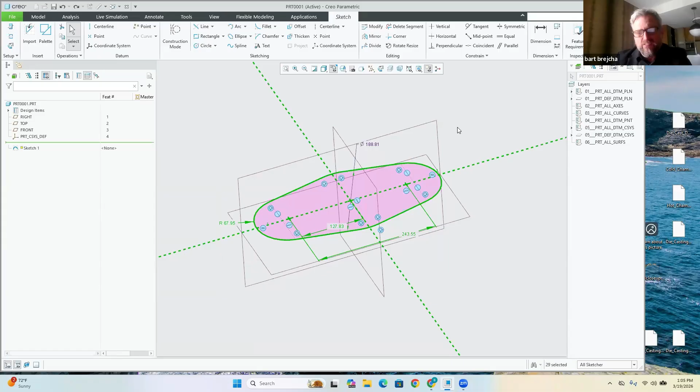So I started to build this little shape here. This is something out of our Learn to Design course. And what I'm going to do is right hold down and reach for this modify button and drag some of these dimensions around. Oh, look, I missed one. So you can click on it with the control key and it automatically adds it to the dialog box.

This is one thing that's different between a mid-range tool and a high-end tool. The high-end tool, I could hold the control key and add to it. And look, now the whole thing scales. This has been in Creo since Wildfire 2, but pretty cool. Now I can just type on one of these numbers and type in 2.5 or whatever it is, and now my part's a more appropriate size because I started a little bit too big.

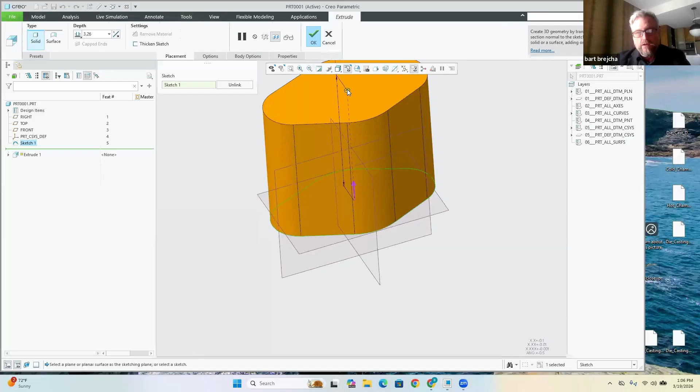All right, so what I want to do next is talk about model-based definition.

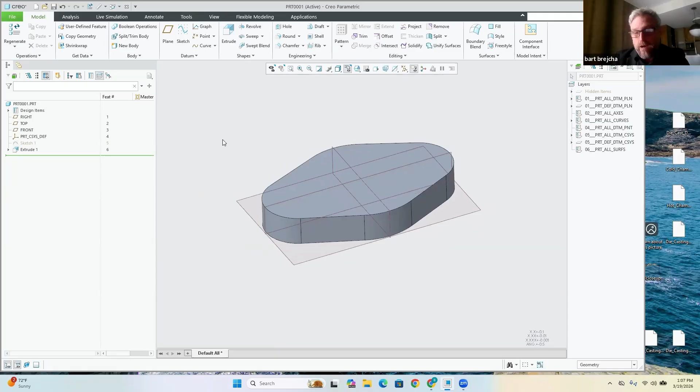I remember hearing Deb say MBD, and I was like, man, all these acronyms drive me crazy. MFG, TMB, model-based definition, or is it multi-body, right? So I'm just not a three-letter acronym person, but I know our managers are. So if you hear me ever make a three-letter acronym, I'm being passive aggressive about it. I'm just being funny. But so this part is let's talk about MBD.

So I've got this annotate button, right? So if I make a drawing out of this thing, that's going to be my front view. There's my top view. There's my right view. So I'm under the annotate tab. I tell young people annotate's kind of like a dimension on a 3D model. So although we've got the word dimension in here, right?

So this is the basics of GD&T. In our 2-day GD&T class, we'd probably spend an hour and a half playing in the model-based definition. And the super value is if we can set up all these GD&T values inside the 3D CAD model, it just automatically displays in the detail drawing, which is what we're trying to do, save time. Nobody wants to spend hours and hours building drawings, but we all do it.

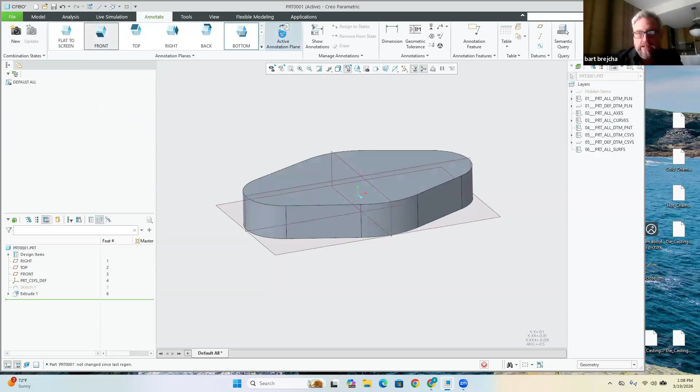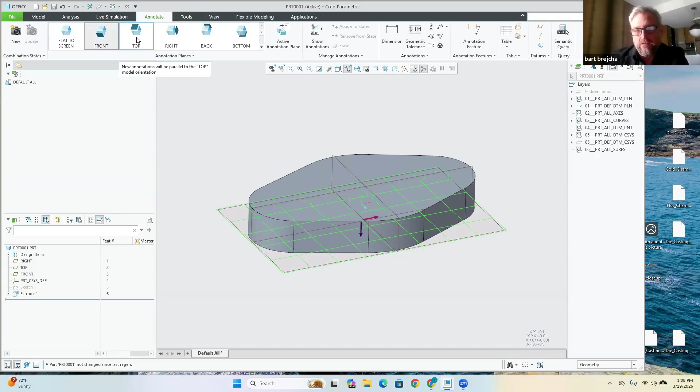Okay, so let's look at that again. I got annotate, I got the front view, and if I click on active plane, it shows me the front view. So this is probably new, I think, in like Creo 2, Creo 4, something like that. So if this is new to you, speak up. I'm curious. The only way I know if it's new is if I'm in a Creo user conference in person and people are like, well, back up. What did you just do? So clicking on this sets the drawing view that the dimensions are going to be in.

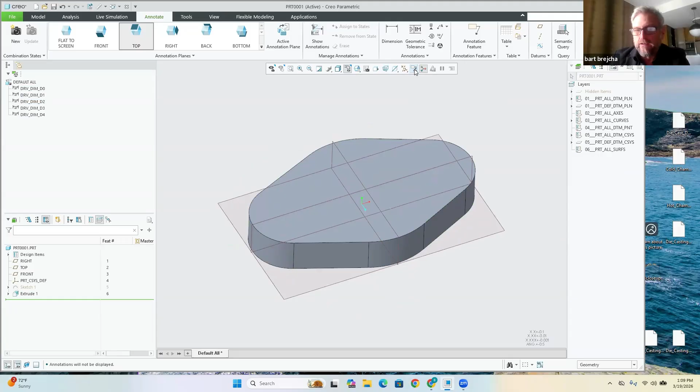Now I can come over to this Show Annotations button and click on the model. Remember how we show the model dimensions in the detail drawing? It's the same thing. So I can select them all and say, okay, and now they're always on the screen, which can be irritating, but most folks don't know that that's what this button does. The annotation tab turns them on or off because it's a little confusing having all the dimensions on the screen.

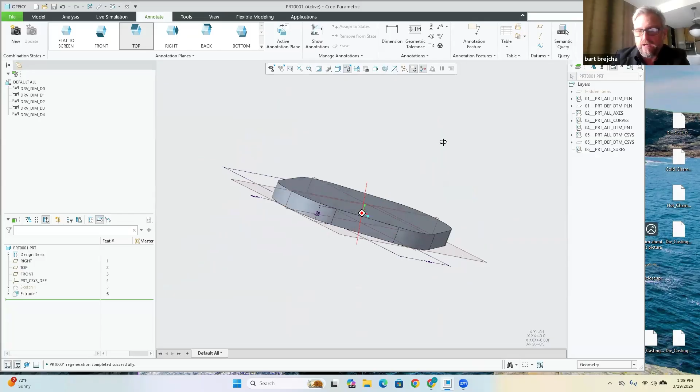Now I extruded this thing in a particular direction because I'm particular about that stuff, but my dimensions are actually on the sketch that are on the plane. And if you need them to be a little higher up, you can just left click on the dimension, right hold down, and move it to a particular plane, which is a bit confusing because the other dimensions are still on it. And as you can imagine, you can hold the control key down and fetch all the dimensions, right hold down, and move them to the proper plane.

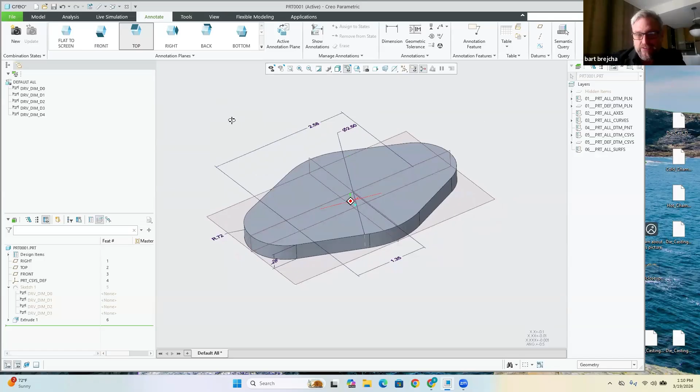So I try to encourage young people that are taking our Learn to Design course or even seasoned veterans taking our surfacing classes to go slow for a minute. Let me show you all the cool new things that are in Creo. Sometimes the surfacing course could be 30% Creo update training plus surfacing. So the more experience we have, I think the more we have to learn, because the software has changed so much over the years.

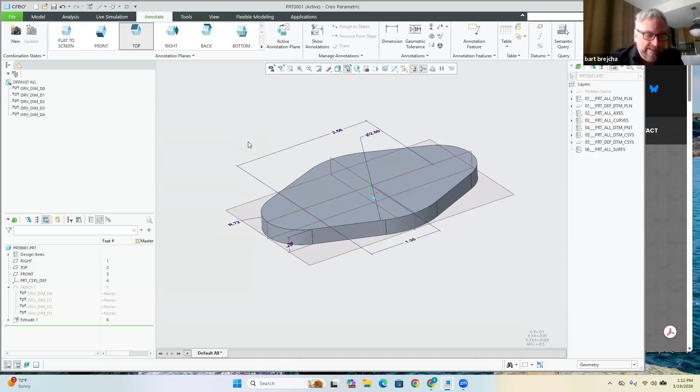At one point, I had over 150 products at Target. I mentioned that at a conference, a holiday party, and one of the owners of the design firm called BS on me. Most of the products I had on the market were from Beyond Design because I was the engineer there, and to be funny, he was counting the entire line of Scunci hair combs as one product. I was counting that as 14. So most of the products were from Beyond Design that year. It was 2004 or something like that. Barbie flashlights to hair combs.

All right, so Design Engine. And I've been speaking at the conference for what, 25 years, Deb? 30? Yeah, been a while.

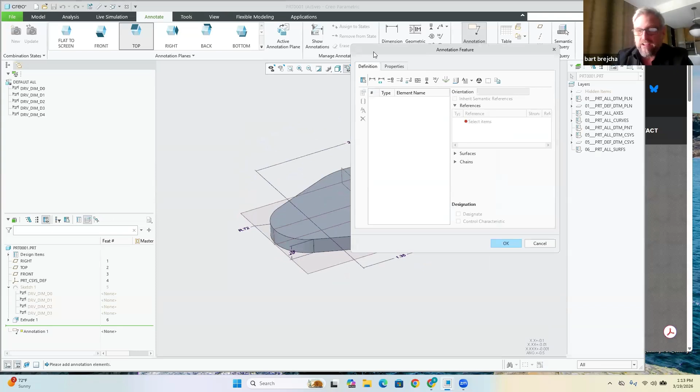So I've shown the dimensions on the screen, and look, they're in position where you want them to be. So there's a bunch of things you can do. You can create an annotation feature. I'm on the technical committee to help PTC develop the tool, but one of the things I like to do with the annotation feature is just make notes in the model tree. If we're doing a plastic part design, I might put a note in here that says TPE starts here. And that's nice for me when I come back a year later. So any features after this are for the soft touch rubber.

So there's other things that we can do with model-based definition. So I'm going to stop playing with this for now, but show dims is how we call it when we're showing dimensions in a detail drawing. So if I make a detail drawing out of this, all the dimensions that I used automatically are sort of earmarked for the drawing, which makes it so much quicker.

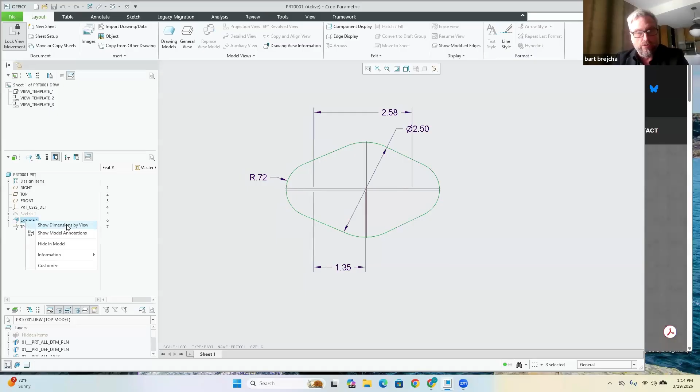Another thing I try to get people to do, even seasoned veterans, because if you got 700 to a couple thousand features on the model tree, show all is just overwhelming, and that's going to make me want to take a 2 hour lunch. So what I do is I tell people to show the dimensions one feature at a time, and then move the dimensions or determine whether you want to get rid of them or not, or you're going to take it back to the sketch to change it. All right, so let's be done with that.

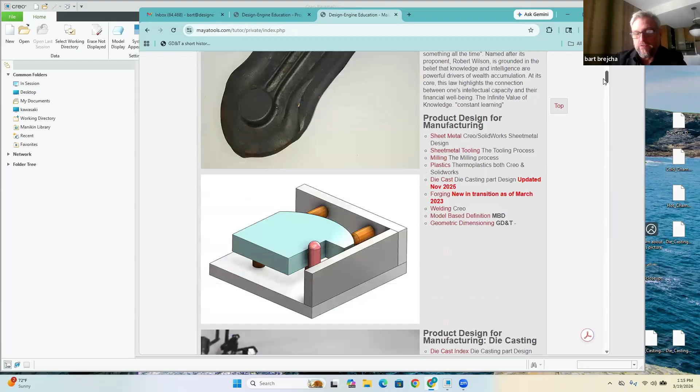All right. So my first job doing GD&T was 1992. And my dad and I sat down and looked at the GD&T book. You buy an ASME Y14.5 book. It cost $75 back in those days. And we spent all weekend looking at it because I had a job that required GD&T. It was AutoCAD. I spent part of the day building the model, and I turned it in.

And the checker wanted to know what the box was around the text. And I didn't quite know how to answer it because I thought it was a trick question. Well, it's a basic dimension. I explained what a basic dimension was, and he got really annoyed and said, "We don't do that here." And the job description was GD&T. What I didn't realize is that there's a bastardized version of GD&T at this company. Part of it's from the 50s, part of it's from the 60s, part of it's from the 70s, and well, I think actually it was like

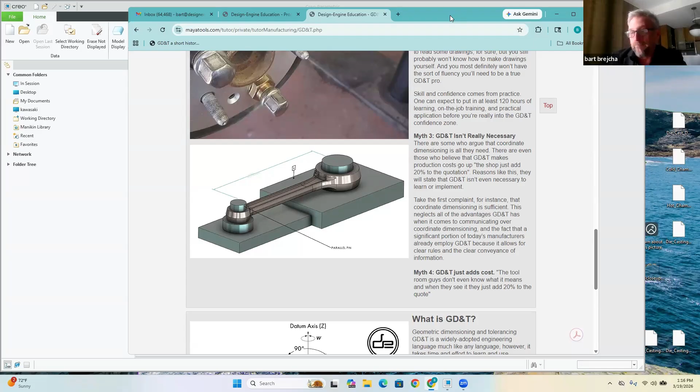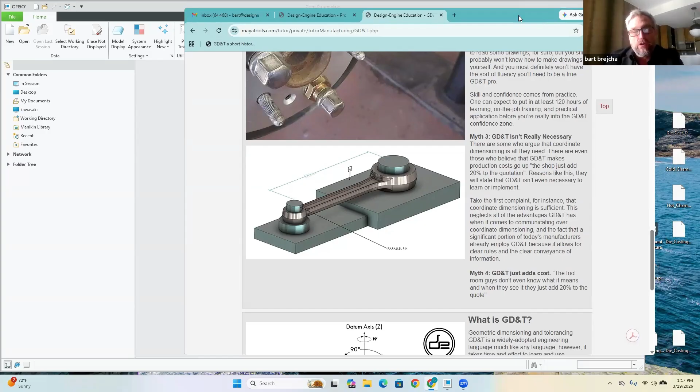I think 2009 was a release, and 2018 is a release. So what the software manufacturers do is they kind of put their 2 cents in and say this software should work like this. And then they make their software do exactly what they voted on. So it's really hard to cheat and make the software do something like from 1970, you know? They've taken out that functionality. So be mindful of that as you experiment with this stuff.

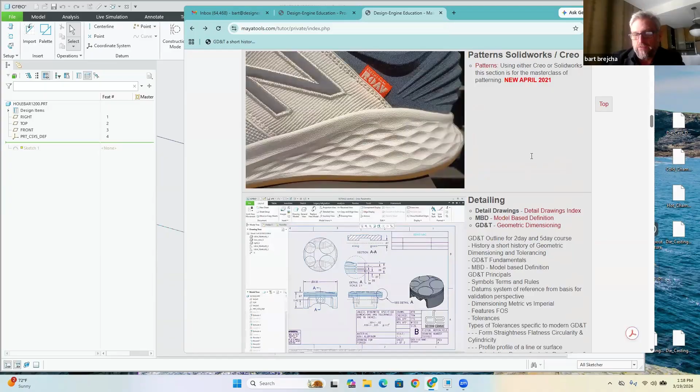So this exercise I'm getting ready to play with is called the hole bar, and I've got probably 20 books on GD&T, and I took it from one of the books. So what I'm going to do is go to that in our Learn to Design course and just talk through it for a quick second. So if you send an engineer that has maybe 1,000 hours on Creo, you would send them to our Learn to Design class, and we kind of send them back trying to show you something, right?

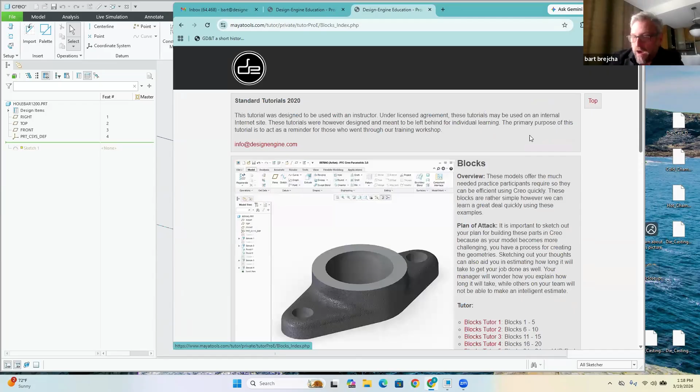So we do top-down design, detailed drawings, and they model all these blocks in a day. And some people get pretty frustrated because they think everybody else is building them faster than they are. And we talk through all the cool new things inside of Creo, like split bodies and what have you. And on day one, we're coming down here to look at sort of GD&T, and I pose this question: if you know GD&T, what's wrong with this thing?

So Design Engine, we like to learn from mistakes, and you can't have a B datum with respect to a B datum. That doesn't make sense, right? So I like to leave some of these typos in here to just kind of think about it. So this one's a profile dimension that goes from X to Y. See?

But you wouldn't have a maximum material condition on the tolerance for that as an example. So that's kind of wrong. Not kind of wrong. Inappropriate might be a better word. So there's two holes. This should say 2x here. Oh, there it is. Yep. So that's good. Here's another one. Perpendicularity should be relative to A, not B. So little typos in there.

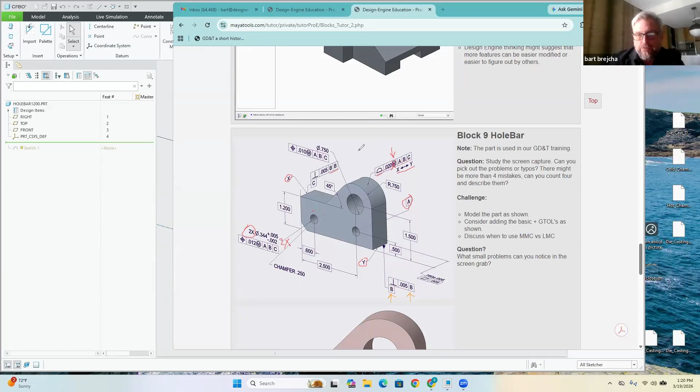Let's build this thing. And my intention is to show you a few little, let me double check on the time. So my intention is to show you a few little tricks inside of Creo. I happen to be in Creo 12. Creo 13's released. Did anybody download that yet?

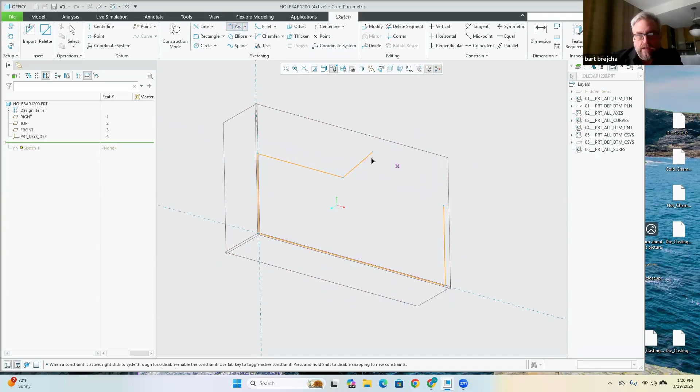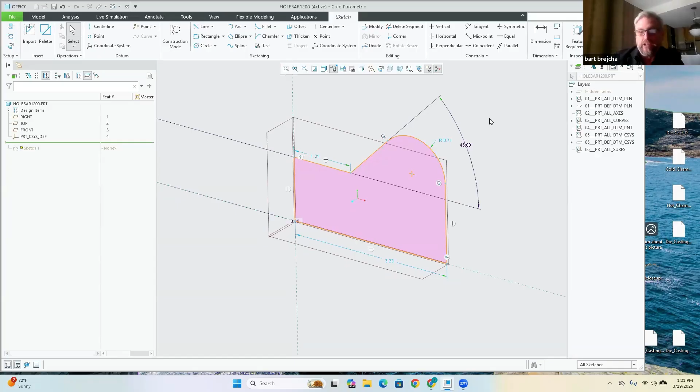Okay, so Bart, I was just going to say, I think it's not officially released until the middle of May. Is that, do you know? Oh, is that true? That's what I think. Okay. They usually do it then, yeah. I'm good because I feel bad because I feel like I'm the first one to download it. One of the applications engineers, I keep bugging him when it's going to come out, and he goes, "It's going to be on the website at 4 a.m. tomorrow morning," and I'm like downloading it at 4 a.m. Early adopter to a fault.

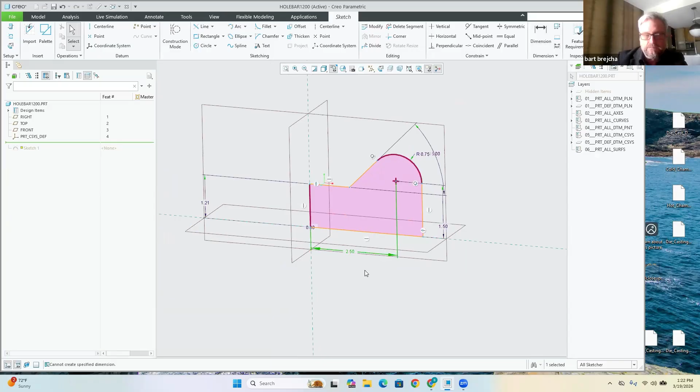Okay, so I built this sort of hole bar example, and I'm just going to dimension it like it's required. Oh, it's already got that dimension on it. Okay, so what else? 45. Let's see. I think it's got this height to it. I need to refer to the drawing. I think this is 1.50. I believe that's about right. And if it's wrong, we fix it. And I believe it's 75 thick.

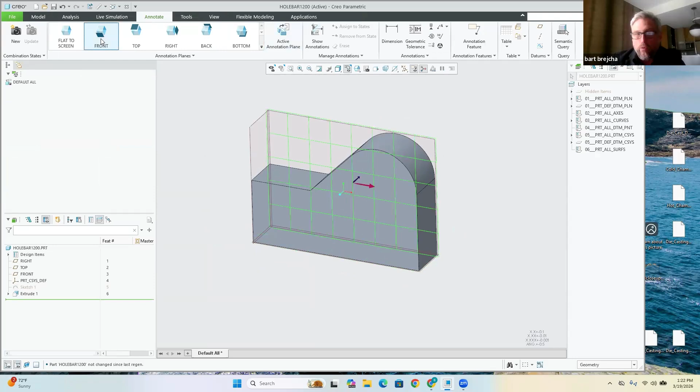Okay, so let's go to our annotate button and think about this, right? So my annotations are turned on, but none are showing. What view do I want it to be in? So I click on the front view, and now any dimensions I show are going to be in that front view plane, kind of like I'm in a detail drawing. So I pick that, and just like I'm in a detail drawing, I'm just going to pick them all.

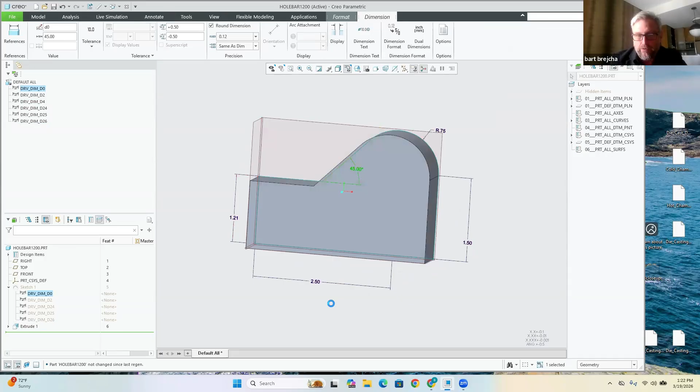Now, the ones that are behind there, you don't see, right? So that's kind of annoying. So I can grab that one while I'm at it. I grab them all, right? But if we need to practice, you do them one at a time, like we need to practice. So I'm going to say, move all those to this plane. Now they're on the front, right? This one's got to be 0 decimal places. So we'll just punch that to 0. And the rest, I'll leave at what the, in metric, you have a leading 0 in the front, right?

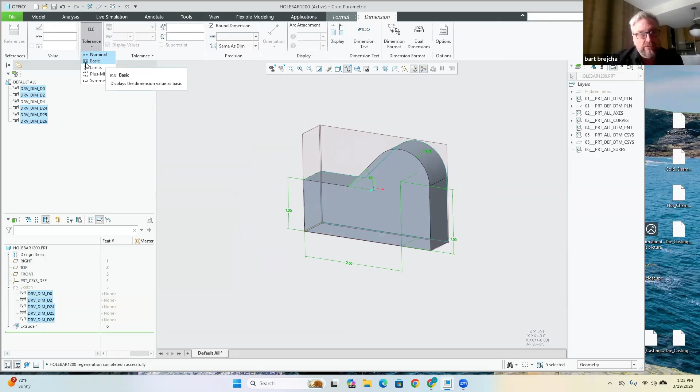So let's see. This is supposed to be 120. Cool. And then let's take all these and make those a basic dimension. So if you're looking for this stuff, you could be kind of challenged to find where the basic dimension's located.

This is the box around the text that the CAD manager in 1990 asked me, "What's the box around the text? We don't do it that way." I was like, "Okay, got your own way to do GD&T. That doesn't make sense, but I hear you."

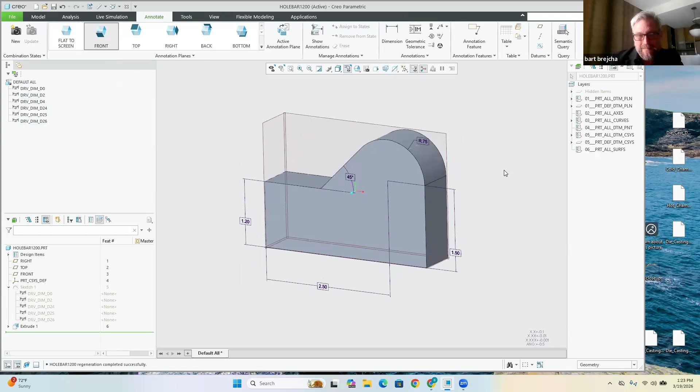Great. So now I got to put the holes in. Let's go take a quick look at, move the zoom window out of the way. So if I put this hole in and then this hole in as a separate or pattern it, I won't be able to show these dimensions in this way.

So when people are learning Creo and they're coming from SolidWorks, it's clear to me that they don't even know SolidWorks, because this is how SolidWorks would do a hole. You have a sketch. I'm going to set it to 2.5, and I think it's supposed to be 0.5. I built a sketch, and the sketch is going to have the holes in it. See, 0.6.

So at the end of all those, at the end of my sketch, let me check out of it and show you what I mean. I'll hit hole, and it puts the hole at the sketch.

It's funny because when I tell people that's how you do it in SolidWorks, they're like, "No, SolidWorks doesn't work that way." Then I have to fire up SolidWorks and show them. And they're like, "When was that new in SolidWorks?" I don't know. The same thing that we think about in Creo. When was that new in Creo?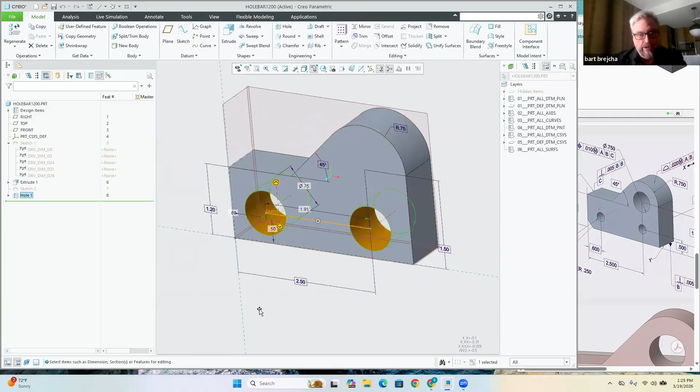So that hole now has one dimension on it that I can assign my GD&T to. It's 344. All right, so let's start putting other GD&T values on it. So notice I'm rotating my screen.

If I'm really smart about it, I would create a named view, and I have a map key that would let me organize my view. In this case, the map key doesn't exist in Creo because I teach people how to build the map key or the macro. So it doesn't work, but you want to have it set to a very particular angle because that's what's going to show in your detail drawing.

Or if you want to set up the named views so that the people in the shop, the inspection team, can have a 3D annotation set up like this. Okay. So this one's got to have 3 decimal places if that's how you're rolling it, inches.

All right, let's put this tolerance on, the profile tolerance from X to Y. So I would go to my annotation tab and put this leader note here and say X and then Y.

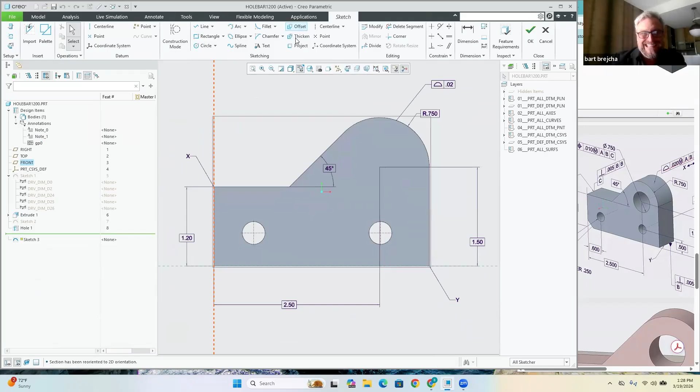I'm using the shift key to get over to here. You see how I offset it? So if it's 20 thousandths of an inch, I'm going to go 10 thousandths one way, and I'm just going to exaggerate it a little bit and put it 30 thousandths one way. Then I'm going to offset it the other way. I'm using the shift key to get around to the other side.

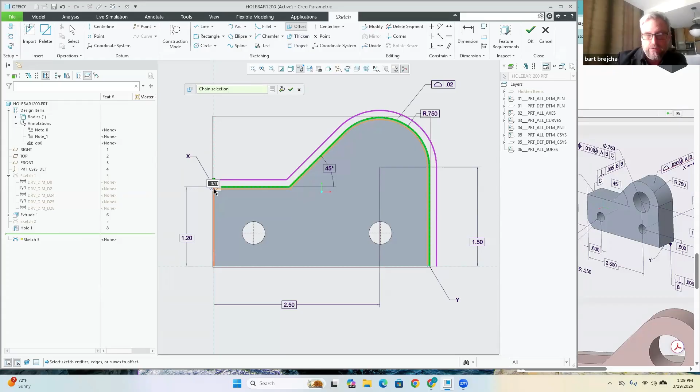By the way, we've been asking PTC to do it this way because this is how you do surfacing. And when people take an update training class, they want to get it back to how it used to be. And that's probably not how we want to roll; explore all the cool new stuff.

So I'll make this one 30 just to be exaggerated a little bit. And what I'm going to do is just extrude a surface so you can see what the tolerance zone is. Right, so I'm going to extrude it as a surface, cap the ends.

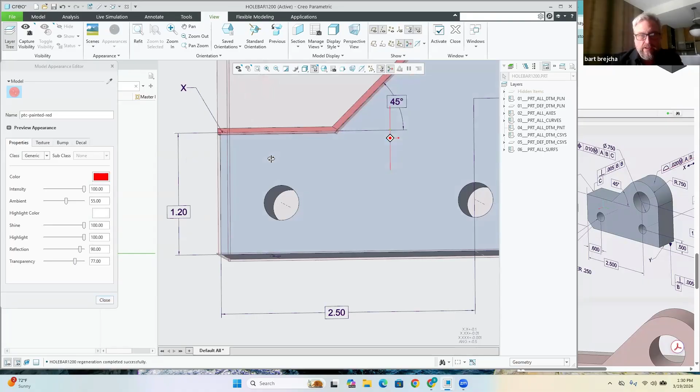I'll make it extend just a little bit above, and then I've got to color it maybe a different color. So I'll right click through and grab the surface body, middle click, and then edit that color to be a transparent color, like a good 70%. So that's what the tolerance zone means when you look at that profile here.

Let's make it relative to A, B, C. So you just type. PTC shouldn't let me do a lowercase letter here. It should just convert it to capital letters. Not usually in that part of the. Right. And then maximum material condition's not appropriate in this case. We've determined that that might be a mistake.

And how do I get the arrows to go from X to Y? Let's experiment with it. You could set it to be all the way around, like your weld symbol. You weld all the way around. Come over here to additional text. This is where I want my arrow to be.

Now, if you don't remember this, you can bug me for it, and I'll do a lunch and learn with you. But you can go to this symbols directory while you're in the middle of this dialog. Creo has a lot of little tricks like that. I want this one. Look, it just put it in there for me.

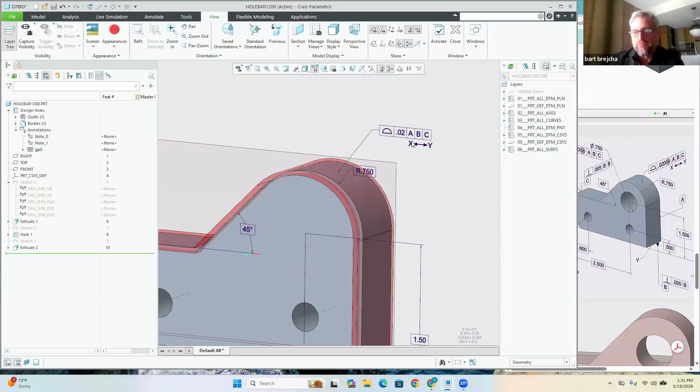But I want to go from capital X to capital Y. I put a lowercase y in there to make a mistake to show you that everything's capital. It should just automatically make it capital for you. So from X to Y, I'm measuring with that sort of tolerance zone. I'm just going to hide the surfaces so it's gone. But you get that. I just wanted to illustrate what that ultimately means.

I hope I'm not talking down to anybody. I don't know what you guys know, so I'm just throwing stuff at you.

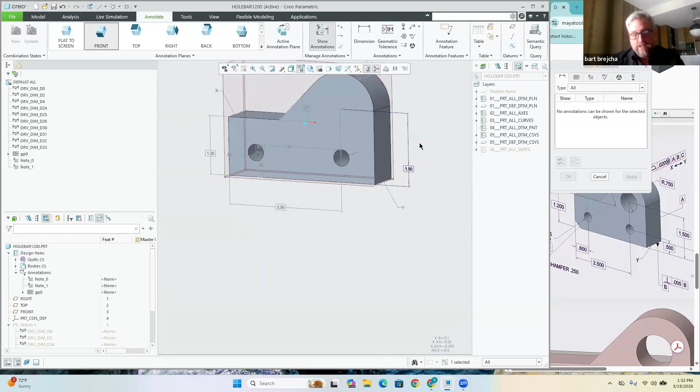All right, so let's do another one with the annotate. Let's show the annotation for the hole. There's my 34. Okay, so I told which dimensions need to be showing in what ultimate view, like I'm in a detail drawing, and then these need to be basic dimensions, theoretical numbers.

Okay, so in this case, my sketch that I built, remember when I put the hole in, I dimensioned it wrong, right? So I'm going to delete that hard dimension and reestablish the dimension the way I meant to do it. Couldn't do that if you built the hole or patterned it, right? So this sketched entity is a really smart way to build stuff. The cool new way, if you will.

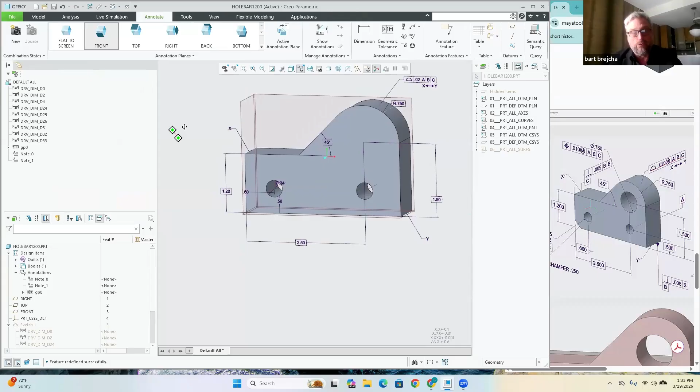Of course, it's 10 years old, but that's what we do. We learn new things, right? So let's see. Show dimensions. Look, I could show the dimensions right out of the feature tree. Set that as a basic dimension. And these as well.

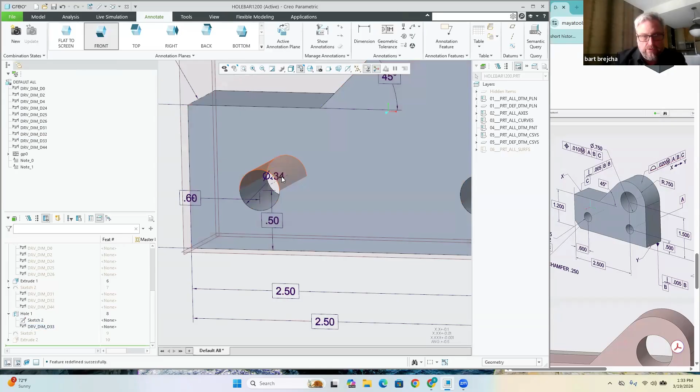All right, so this one needs some positional tolerance to it. So I'm trying to pull it down. Of course, it's not letting me move it. I'm just going to go ahead and pop the geometric tolerance on it. So to do that, you pick the actual dimension itself. It tends to remember the last thing you put in, which could be a bit annoying. I'll just punch it to positional, go to my additional text and remove through X and Y.

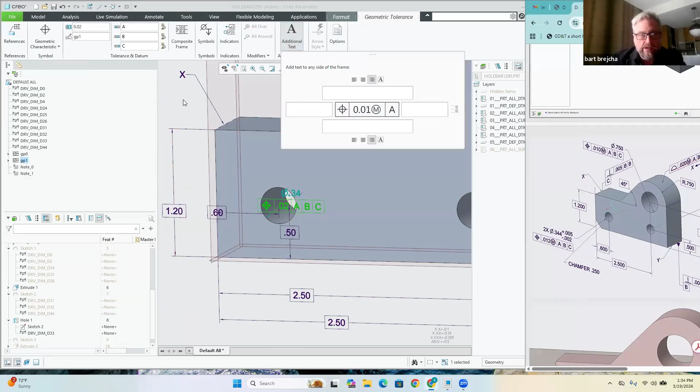You need a maximum material condition. And yeah, so again, I come over to my symbols and put my M in there. One thing that kind of annoys me with PTC is they don't just make this dialog box big. They make it small so you have to drag down the arrow. I wish I could be more involved in beta testing.

All right, so there's my maximum material condition. And look, it drops the icon right in the dialog, which is pretty cool. And we're relative to ABC, so I'll just leave that. Let's see if it lets me move the icon any better now.

Yeah, I don't know. Dexterity's off on my mouse.

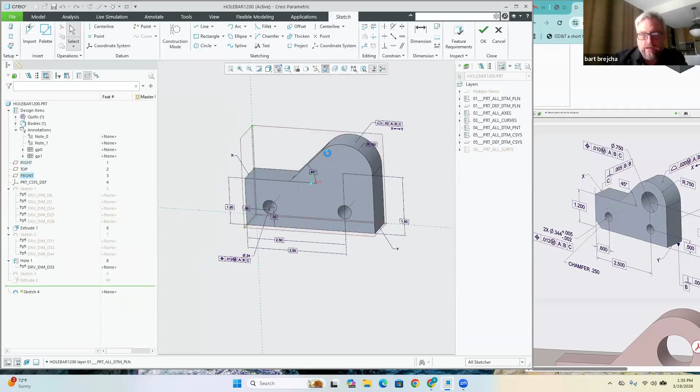Okay, so just double check. I've got positional tolerance with 12. Let's think about what that means. So I'm going to illustrate what that means using a surface just like I did before. I have my surfaces turned off, so it's not going to show. So typically, the square references look like that. So I'm going to left click on each of these and turn this to construction geometry.

And what I'm going to do is draw with the annotation tab. All this is bonus area. And I shouldn't use the word bonus because you have a maximum material boundary. And so anyway, this is extra room. The cylindrical, middle click. Let's see. I wanted to turn this to construction geometry. Okay.

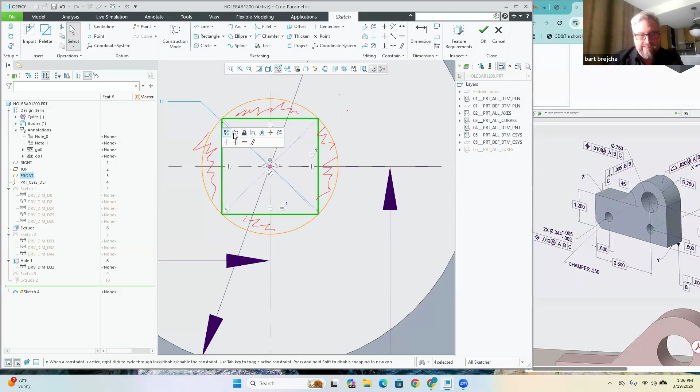And now I'm going to extrude that as a surface and cap the ends just like I did before. My layers are off, so it's going to disappear. But that's the first thing we think about with surfacing is that it's probably on a layer, right? And then right click through and grab that shape. Right click through is the same as coming down here to hit quilt. It's just faster to right click through instead of dragging your mouse to the bottom of the screen.

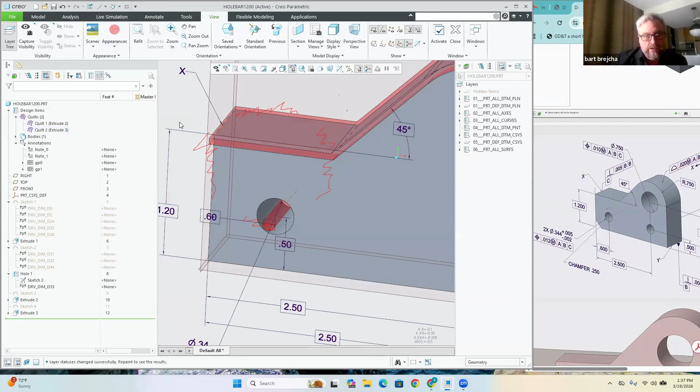And then I go to assign that material to it. So that's what that means. It's a tolerance zone where the center of the circle can be moved around. All right. So the rest of this stuff is kind of the same thing over and over. And in this case, I have some tolerances that I can adjust.

Earlier today, one of my coworkers was unable to get the tolerances to show, and we had to go and turn on the config.pro because PTC, the default config setting, has tolerances off. And we set the tolerances to favorites so we could remember what we picked. And then your DTL file on the drawing has to have tolerances on too. If anybody wants to go through that, I can go through that.

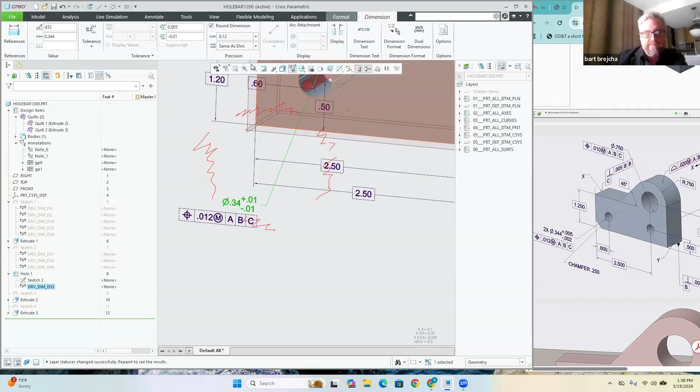This was supposed to be 005, and cool. I don't have my 2x on there. I always forget in drafting, does the 2x go before the number or after the number? I'm still kind of unsure of that. I need to have a set of drawings next to me to refresh my memory with that stuff all the time.

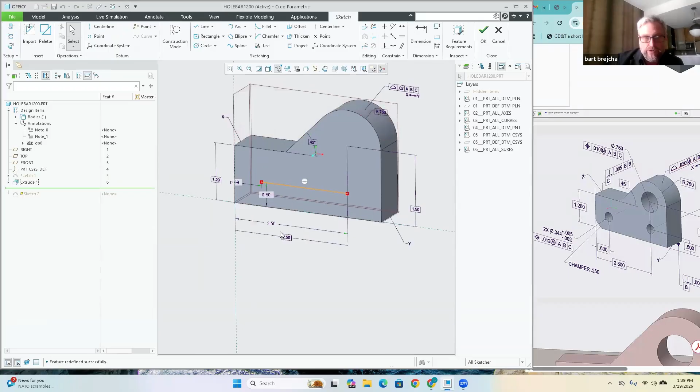So notice how there's two 250s. That's because I showed those dimensions. If I wanted to be smart about it, and of course it's extra work, I could take this sketch that derived these holes and build an alignment to it so that the dimension goes away. How do I get that dimension to go away? Well, it needs to be associated with the top of this hole. So it's a little bit of a challenge.

If you're trying to be particular and always show your dimensions, which I think is kind of not the smart way to do it. Does everybody know the difference between this point and this point? And I mean, sketcher mode. This point will mature once it extrudes to an axis.

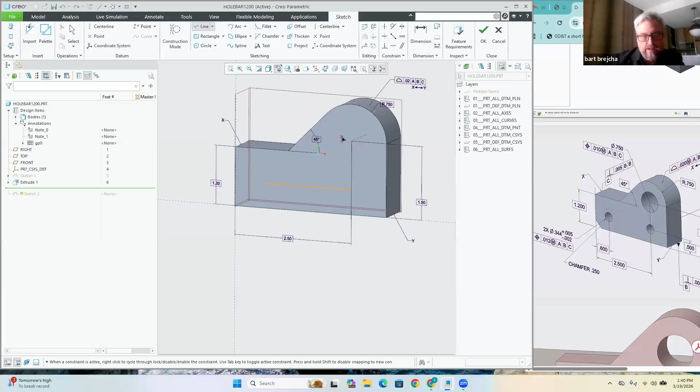Now I'll redefine the sketch that I used to make the holes. I'm going to align it. This might not be necessary, but I'm just kind of doing a thought exercise. I'm literally going to align this to the axis, and then I'll force a vertical on the sketch itself, and then left click, right hold down, and turn that to construction geometry.

Now the 250 is gone, and it won't let me show that dimension inappropriately. As you move the geometry around, that hole is going to always be lined up here. And that's kind of the assumption that they're trying to make here. All right, what else? We got to assign some datums. Let's do that real quick.

Annotate geometric tolerance. So what I'm going to do is take this icon here, which was new somewhere in between 8 and 9; they switched to this icon. So what I did is I right clicked through and grabbed that. I took the icon, or I'll delete it and do it again. I took the icon for the defining datums, and I hover instead of rotating it around like our amateur version of ourselves. I'm going to right click, left click, and fetch it.

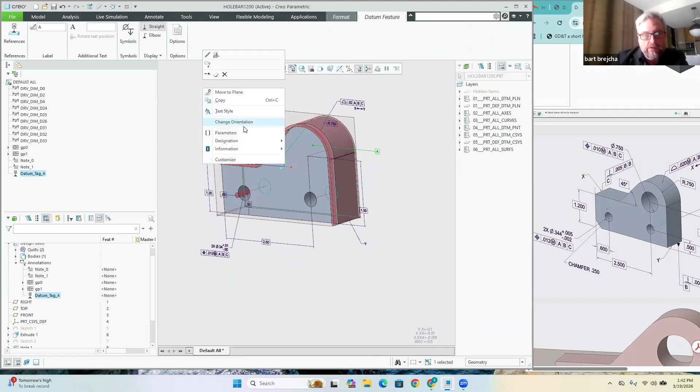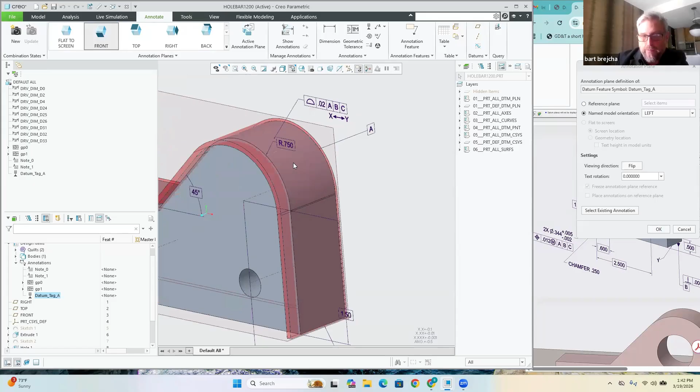Okay. So now what I want is for that arrow to be pointing straight in. So I can left click on it, right hold down, and change orientation. Instead of flipping it, I can come up here and say I meant for it to be on the left plane. You see this left plane here is highlighting. So that's pretty cool. And that's pretty clear that this is pointing to the back face, even though you can't see the back face. Typically, if the line is dashed, then it's pointing to the back face. So there could be a user interface option to make that line dashed.

For die-casted parts, we're often defining a square or round location for the probe so that when I probe that geometry, I can have it set up on my CNC machine to do the machining operation. So that's something that I'm not going to take time to cover today with 15 minutes left, but you get the idea.

Let's see, I got perpendicularity back here. Let's do that. Right click, left click, middle click to place the control frame. And then it's asking for perpendicularity. So I'll fetch that out of there. And it can't be with respect to C because this is C. Let's see if Creo will let me make the mistake and do it kind of wrong.

First off, and that's new in Creo 12, it's catching my typos for me. Like if I try to add a symbol here for maximum material condition, I hope it yells at me and says you can't do that. Yeah, I don't think Creo 11 does that. That's pretty cool. Good job, PTC, right?

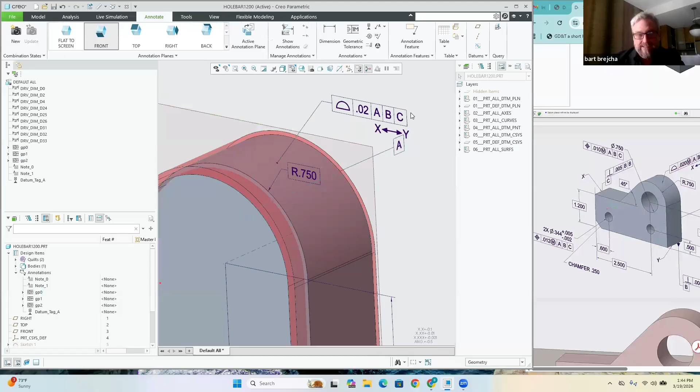So over here, let's see if it'll let me turn this back face into a C. It let me do a B. I would hope maybe it would give me an error, but still let me do it, you know? Oh, look, it changed something over here. That's weird. So this would be with respect to A, B. Okay, so it started to be B and then I changed it, which is why it changed these. So that's easy to make a typo. Be careful.

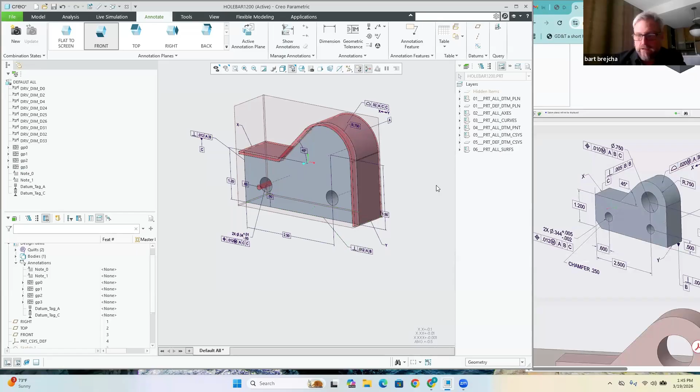So this perpendicularity is literally pointing to that wall, which is the C reference plane. I don't have the B reference plane at the bottom, so let's establish that. Right click, left click, middle click. All right, and it's also perpendicularity. And it is B, so that's going to be with respect to A and C, I think. So let's try that. Whoops, this one. You literally click the icon and you middle click to place it. That is B, and then this would be A and C.

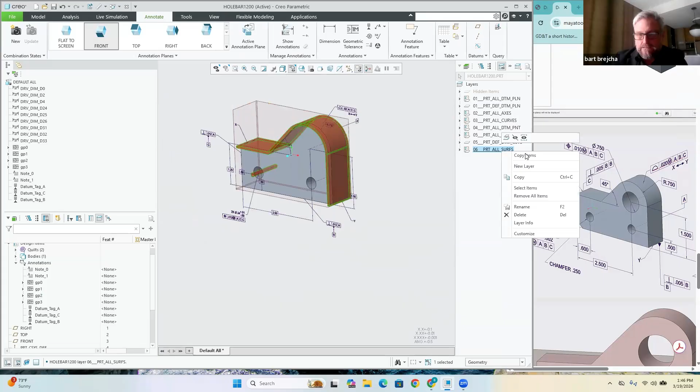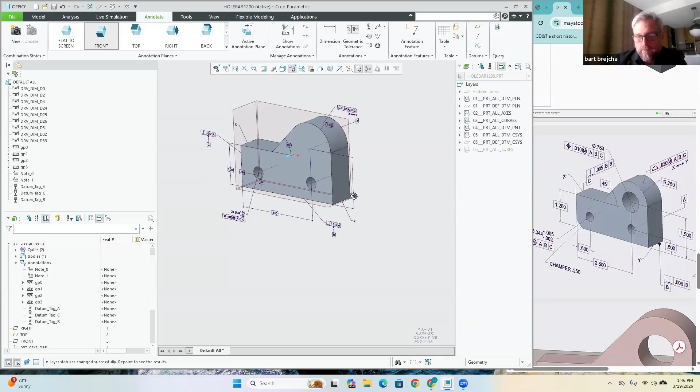Or just, yeah, see there's a typo there. You can't reference both of them. So usually it's just reference to the A. I'm making a mistake here. There we go. This one too. It makes sense for perpendicularity because it's the plane that I'm going perpendicular to. All right. Am I missing anything? Maybe we could ask for questions.

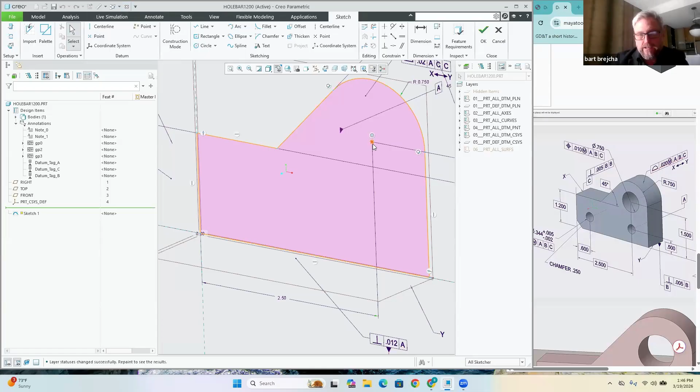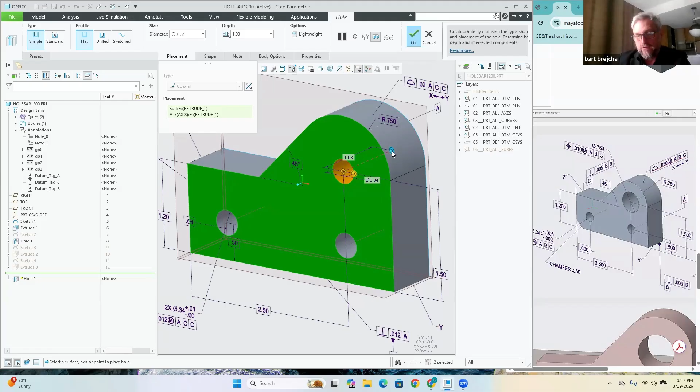I'm going to right hold down on the yellow arrow here and tell that to go through all. That was new in like Wildfire 4, I think. And I think the hole was supposed to be 75. I'll just do that. And then middle click. Now I've got to get my annotation, so show annotation. There it is. It just automatically showed because I had it highlighted. And then that 75 is called out as a basic dimension.

Now, I would say too, if you're going to have a GD&T class, make sure the guys in the shop are in the class. They might not know Creo that well, but at least they're learning what these things do so they can try to speak that language. And if you've ever tried to learn Spanish in high school or whatever, you're really not good at it until you're thrown into that environment to practice speaking. And that's the same with GD&T. You just got to make some mistakes and go with it.

Let's see, basic dimension. Good. And let's, oh, no, it's not a basic dimension. It's calling it out as a positional. I'm making a mistake here, right? Let's do that. Let's see, I'm under annotate, pick the position tolerance, and he has the maximum material condition, and he is with respect to ABC. And he's got 3 decimal places on it.

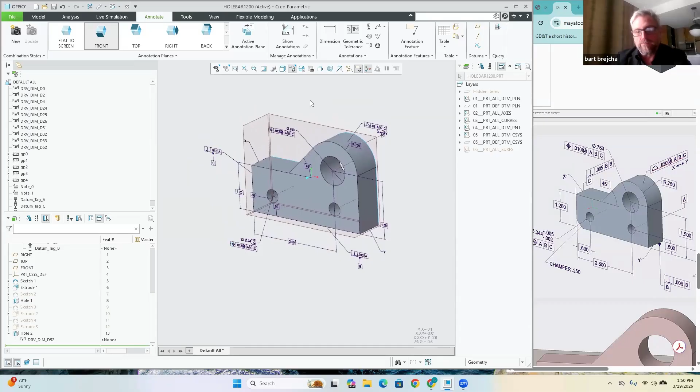And if this product were to injure somebody because the die casting broke, they would look in Windchill. The expert witness would look into Windchill and see if the process was documented appropriately. Did they do the proper FEA? Did they use some sort of electron microscope to scan the part and see any pores inside the die casting or whatever? And was it appropriately dimensioned? Where's the fault? And then they figure out that the person was just driving too fast. So that made sense. All right, let's drop it into a drawing real quick, see how it looks.

Hey Bart, I have a question for you. Go for it. Okay, so our company just switched over to Creo 10 not too long ago from Creo 4, and we added the GD&T extension onto it as well. And I was using the GD&T extension. Right, I'm just using stock Creo. Yeah, so I just wanted to verify, because I was playing around with legacy parts that had existing geometric dimensions and tolerances on them, and when I brought them into GD&T Advisor, it didn't recognize any of those.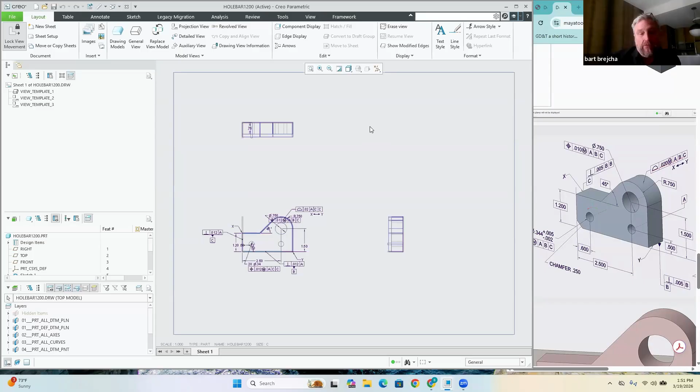That might be because it was all done in the drawing, kind of like our peers who, you know... I could be wrong, but GD&T Advisor, I've not played with it. I believe that works at the part level, right? Not the drawing. Yes, correct. So most people kind of fake it all in the drawing. The way you want to do it is in the part, and look, it just showed in the drawing. All I got to do is move stuff around, and I'm done. Think it's pretty cool, actually.

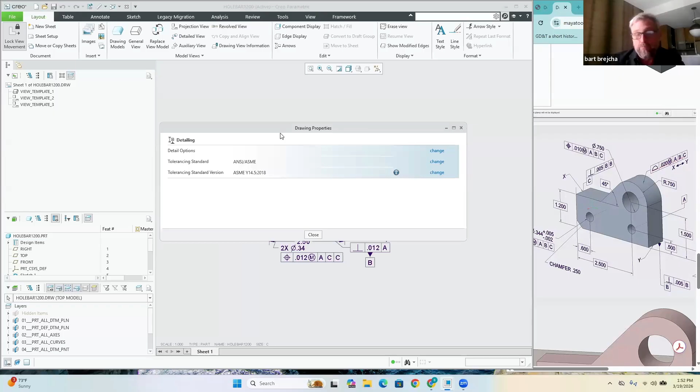It looks like these didn't come up with my basic dimensions. I think I had those as basic dimensions before. I'm not sure what's up with that. My tolerances are turned off in my config, my DTL file, so it's not letting me go and do that. I'm not sure if I answered your question, but I could be wrong, and I'd love to have this conversation. I didn't pay for the GD&T Advisor. That's extra for us. Right, right.

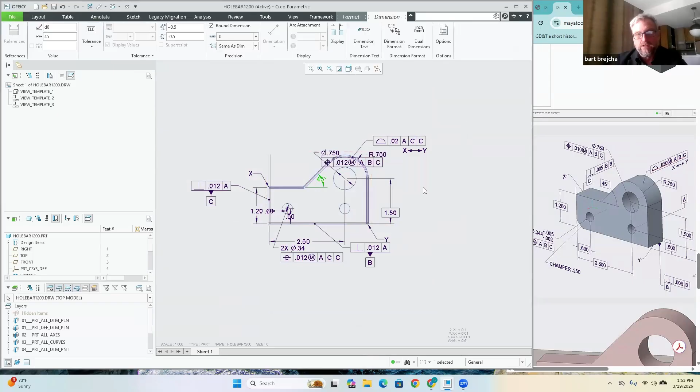Okay, yeah. Well, I created a part and annotated it in the part and then pulled it into GD&T Advisor and it didn't pick it up. Oh, it didn't pick it up then. Oh, okay. I'm gonna have to claim a little bit of ignorance. I don't have any experience with the GD&T Advisor. I think that's made by a separate company as well. Yeah, it's Sigmetrix. I bet you if you got them on the horn, they would show you what you're doing wrong pretty quick. Okay, thanks. Yeah, I've met them at conferences before, and they're all pretty cool.

Hey Bart, Brad here from Mercury. What do you feel are the advantages of adding those annotations in the 3D model versus placing them on that 2D drawing page? So there's a couple different ways to answer that. If you do it in the model, you're thinking holistically, and the model is what goes to court, not the drawing, if there's an injury. And the other way to look at it is model-based definition's the cool new thing.

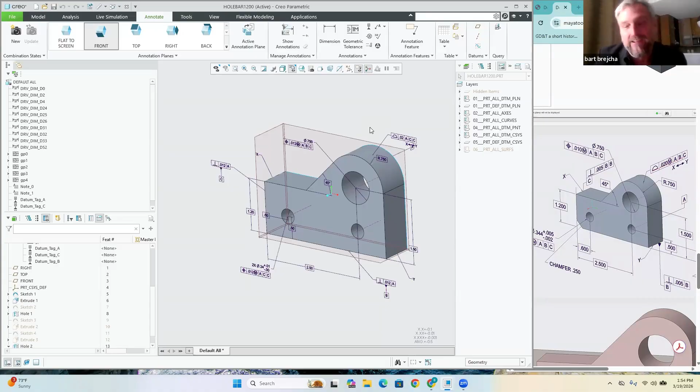And the real holdup for model-based definition is the guys in the shop want a sheet of paper to look at. They want to tape the piece of paper up to the die casting machine so when they get the part off, they can inspect it. That's the holdup.

So should you envision like iPads, someone pulling this up on the screen, rotating and finding these key dimensions and where to clamp it? Yeah, they probably don't have a mouse, so they're going to be... I let go of the mouse and I'm trying to rotate it with my precision workstation. It could be a challenge.

Yeah. This is Mark at Mercury. I know back in the day, with big castings, whatever, we'd originally create the models. You don't know where you're going to put your datum structure. We talk with manufacturing and everybody, they'd weigh in. Then we'd go back and we'd kind of rebuild the model using that datum structure. But that would just take a ton of time.

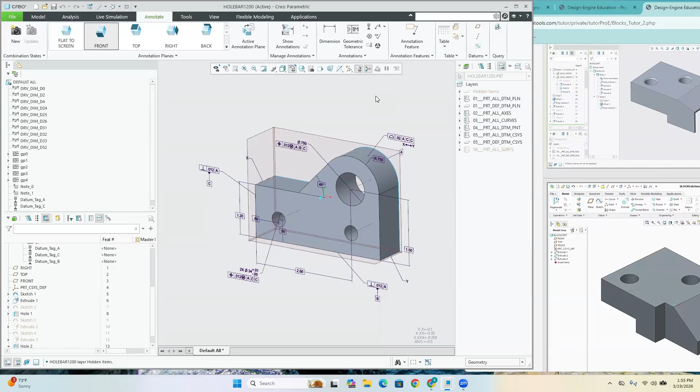And nowadays, we don't always know where our datum structure is going to be when we start out. We make our parts, and then you put your datum structure in a lot of times after the fact, and then we just create all that on the drawing is typically how we do it now. I don't know if there's a better way to do that or not.

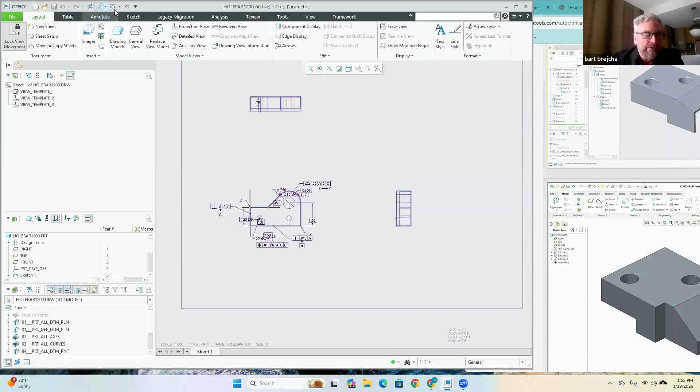Yeah. I think it's just smarter to do it in the model and show it in the drawing. It's kind of like we fight it. Remember when we first learned Creo, we wanted to create dimensions in the drawing, not show them in the drawing, you know. But I think it's smarter to do it in the model, and it's learning something new. So you know, embrace it. Sure. Thanks.

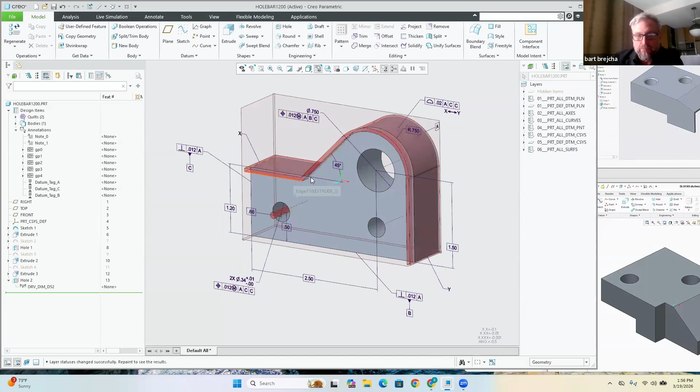Here I'm gonna unhide my layers and get the surfaces back. That made sense, you know, it's a tolerance zone. I just made this really big to exaggerate the values, you know.

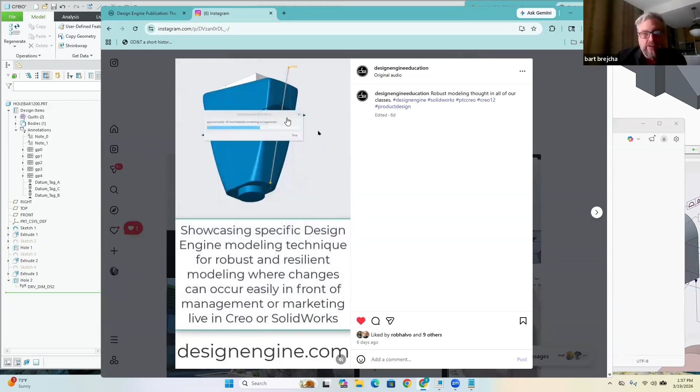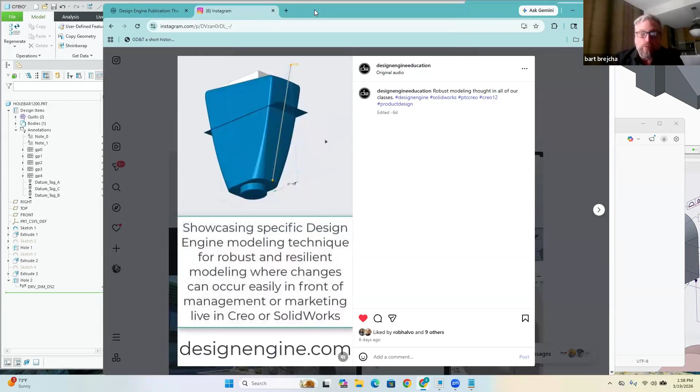And when I demo the surfacing at my next lunch and learn, I think coming up in April, it's a housing and we flex it, and people think that I've canned this demo. But that's what the classes do. We teach you how to can all your models so they behave like this when you show off in front of your manager or marketing or what have you. If the model breaks, fix it so it doesn't break.

You know, I think a couple coworkers are on here. John, speak up. Tell them that's for real.